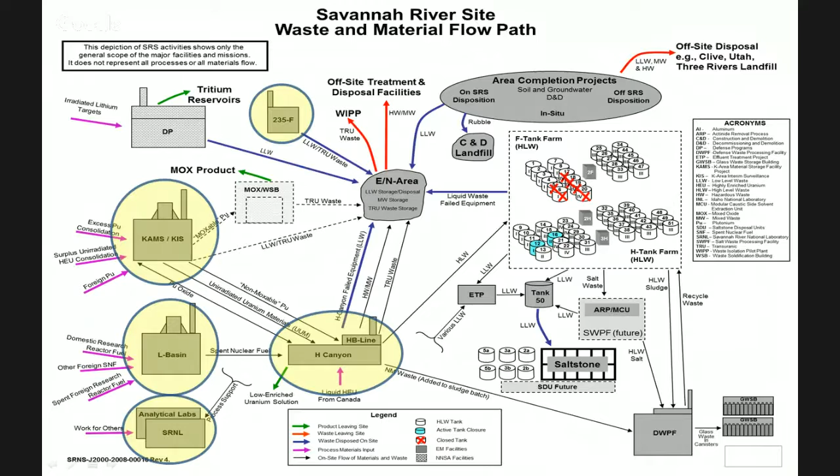Acronyms - most of you are probably familiar with those. Nothing new has been added to the list. In this presentation, I believe I've cut out most of the acronyms and spelled most things out to save space.

And if there's something you see that you don't understand, I think we might have a few minutes so we can take time for interruptions if you want to ask right now.

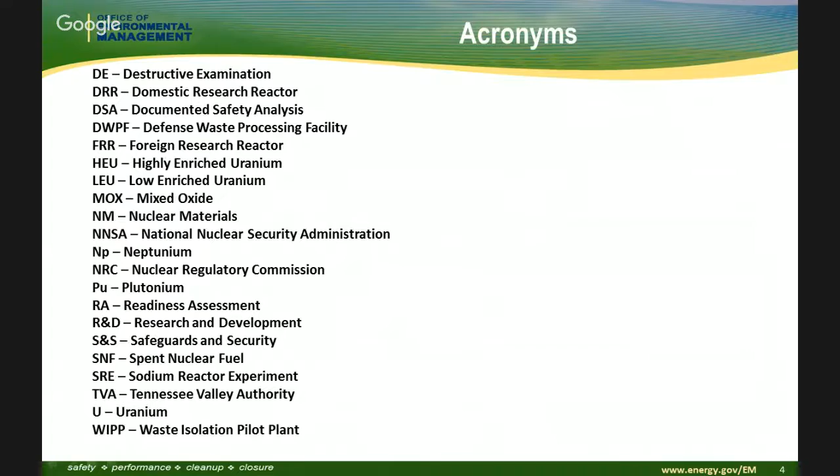All right, so what we're going to go through today for the system plan or management program is talk about the assumptions and approved missions we have in facilities that are operating now in nuclear materials. A couple of pictures here.

This is actually a sampler that was installed as part of a test project for one of the labs on the West Coast - I think it might have been Pacific Northwest Lab. We offered the Canyon as a test bed for some technologies that people wanted to test. This is a version of a sampler that's actually installed and operating in the Canyon right now.

The one that's installed is called Short Path Ultraviolet Visible Light. This is looking at plutonium solutions in the ultraviolet or visible light spectrum. This is a long path, which would allow us to look at more dilute samples.

The short path was actually quite useful when we were starting up HB line and processing material up there. Do you recall there was a robot inspection done in the ventilation, the main ventilation tunnel, back a few years ago? This is actually a 3-foot section of concrete, 1 foot thick, that we core drilled out.

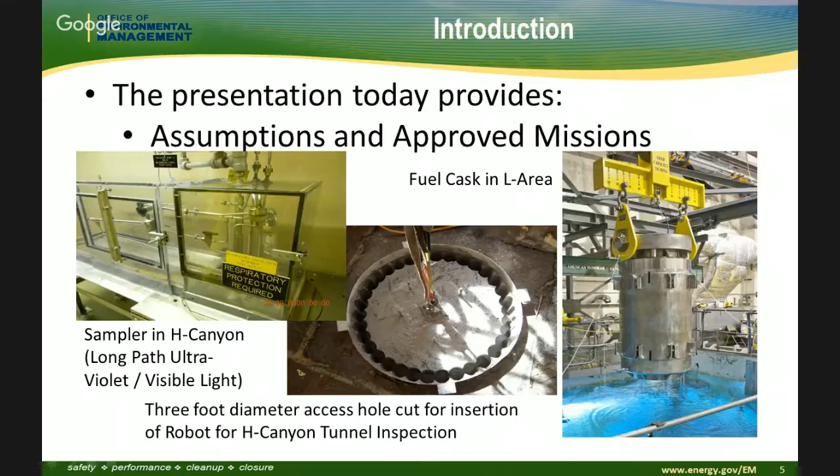Whatever that thing is, all right. That was supposed to prompt Maxine to say what it was, Triga fuels. Go ahead if you want to. No, I'll get it wrong. We don't have a trigger here. Yeah, we don't have triggers.

So this first group of facilities, H Canyon, HB Line, K area, L area, are all under nuclear materials purview. Those facilities belong to Pat McGuire, and I work for Pat. Tony Folger also works for Pat, and Maxine does too. The F area and H area analytical labs are an important part, as well as SRNL. Of course, liquid waste, we couldn't do anything without our liquid waste facilities and our solid waste facilities in E area.

We also have some deactivated or inactive facilities, like 235F. I think you've had presentations on what we're doing there, and I'll talk about that a bit later. F Canyon, FB Line has been deactivated too, but that's a sister facility to H Canyon. The receiving basin for off-site fuels is basically what it says, where we used to receive fuels from off-site, now all consolidated in L area. And C area, a former reactor, along with K area and L area, has heavy water stored there.

We'll talk mainly about these first facilities and what we're doing there, along with a timeline, a bit about the middle section, and less about the bottom section except for 235F. I added a picture from 235F after last year. That's the former 235F facility, which included several facilities, including PUF, that you may recognize.

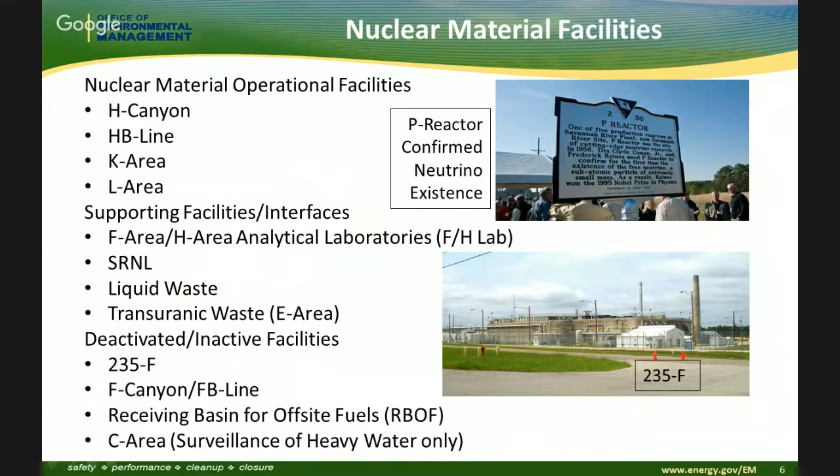So here are the main facilities still in operation, some repurposed but still under Pat's purview. We've got K-Area, which was a reactor facility and is now used primarily for storage of plutonium, and also some uranium. L-Area safely receives and stores spent nuclear fuel awaiting disposition, and H-Area is the disposition facility for spent fuel and also for plutonium and/or uranium stored in K.

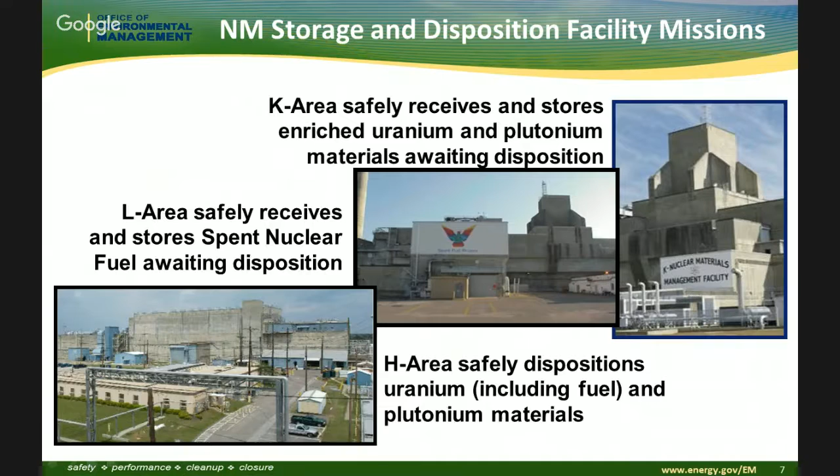General assumptions for our operations: we're always going to support the safe and secure operation of our facilities to disposition uranium and plutonium, and store those materials awaiting disposition. We're also going to meet any DOE, environmental management, and NNSA non-proliferation missions, which we do support. And we support efficient operations, which includes minimizing waste generation.

The picture I added here is spent fuel being charged to the dissolver, dated August 13th, 2012. If you remember discussions about the sodium reactor experiment fuel we processed, which was potentially vulnerable to long-term storage, we began planning for that when Don was there and actually processed it in about a year and a half. That was the first batch of fuel inserted into the dissolver.

This is a shot inside of K-Area. These are what we call 9975 drums, model 9975. Every type of storage container gets a number, and these just happen to get 9975. They can be used for storage and/or transportation across the U.S., and have been used for transportation.

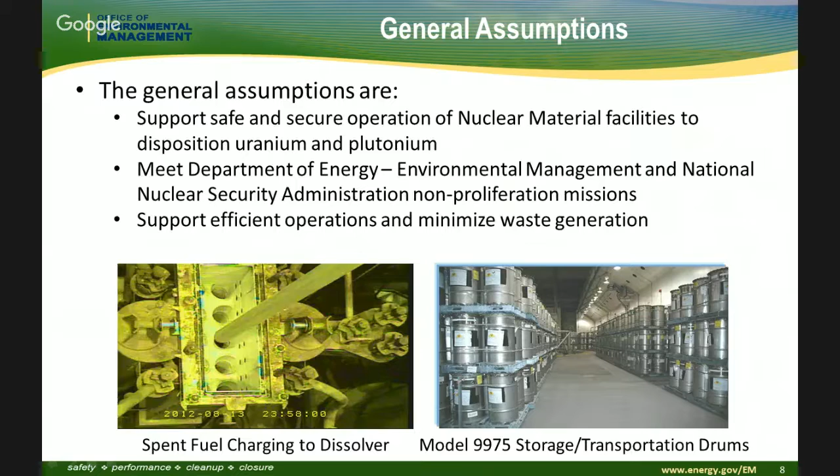So getting into the meat of it, H-Canyon. I mentioned that we had dissolved sodium reactor experiment fuel. We started that in 2013, finished up in 2014. At least a third of those solutions have been sent to the DWPF facility for vitrification, and that is ongoing and will be ongoing for several years. The DWPF process can only take so much at a time, so we'll be doing that for the next 5 or 6 years. But the fuel has been dissolved.

The amount of uranium in there was very low, so we did not recover that and process it for sending to TVA. We are in the process of starting up the parts of the canyon that have been idle since about 2011.

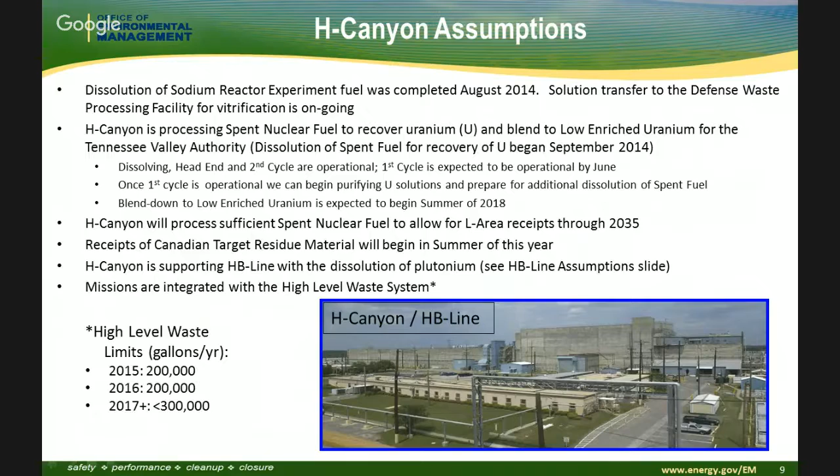HB Line, H Canyon is - I'm waiting for the slide to go back - pretty much a crane-operated facility. There are 2 cranes that travel the entire length of the canyon. Pretty much everything in there is remotely handled. There are some limited areas where people can go inside the canyon, but for the most part it's remotely operated. It's a smaller facility, and it's hands-on operation.

And that's one set of the glove boxes that are in HB Line. And that is an operator right there. He is dressed out in PCs and has his gloved hands through more gloves that actually extend into the glove box.

This is just an end view of the canyon, looking north. And again, there's HB Line. Those are administrative offices, a support facility, which is the top 2 floors.

So the mission right now that the canyon is supporting with HB Line is the production of plutonium oxide that will either meet the MOX spec or would be suitable for blend down in K area. We'll talk about that in a minute. But there is some material that is non-moxable, which we are planning to blend down in K area.

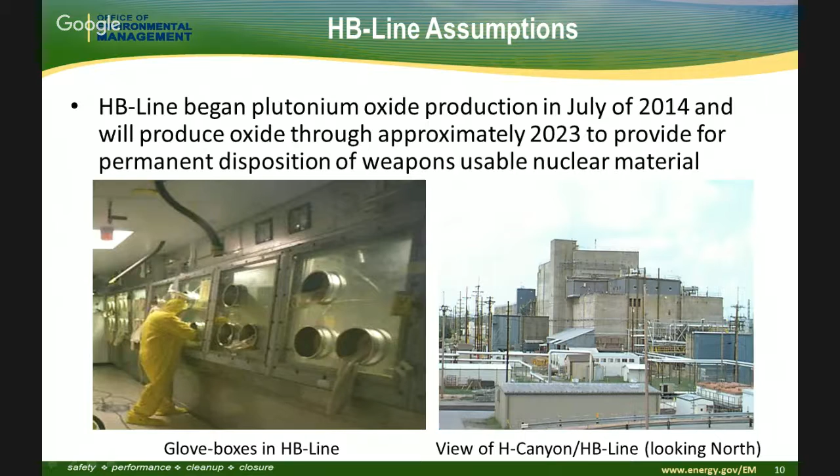So we talked about K area storing plutonium, primarily plutonium, and also some uranium. The plutonium that the Canyon is dissolving and sending up the HB line to make the suitable product for MOX, once it's processed, is sent back to K area for storage until needed by the MOX facility, or if we decide to blend that down for disposition to WIPP. So the second bullet talks about that disposition line.

If we had just one line in K area, we're modifying what we call the K area interim surveillance line, which is where we do destructive examinations, talked about in the third bullet. We're modifying that line to be able to blend down plutonium. Currently, we would take about 150 grams of plutonium, mix it with an inert material, and send that to WIPP. We proved that process up on HB line. When we put the process in K area, we're going to be able to do about 300 to 350 grams of plutonium in a different container that's called a criticality control container.

But anyway, that is going to be the disposition for the non-moxable plutonium, and possibly the plutonium that would be moxable. We've probably done about 80 of these destructive examinations. We actually take cans of plutonium oxide, cut them open, and examine the containers.

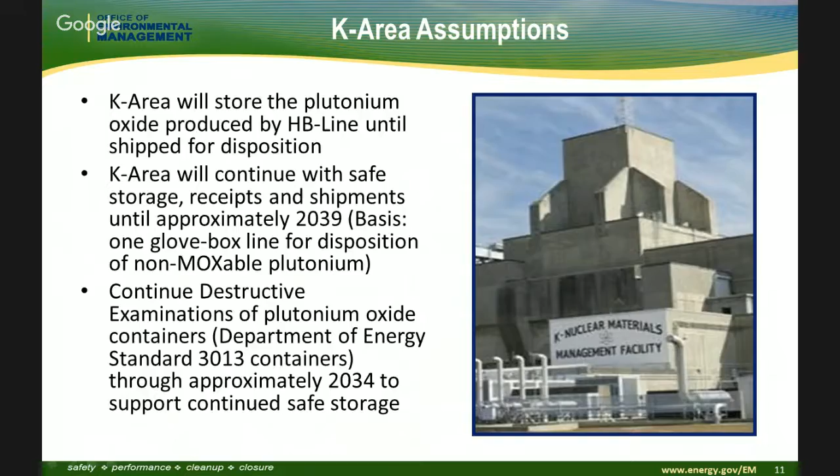All right, so now the L area - I mentioned that the spent fuel has been consolidated across the site. We still do receive foreign research reactor fuels. We receive domestic research reactor fuels. The domestic research reactor fuels come from universities or from a reactor such as the high flux reactor up at Oak Ridge - it's a research reactor. And then the spent fuel, the foreign fuel, of course, from various foreign countries, and I think we talked for some length of time, sheet number 2, on that.

Right now, we have a record of decision that we are not going to receive any more foreign research reactor fuel past May 2019, and we expect to receive domestic research reactor fuel through 2035. That date could be changed, but there is no movement right now to change that, and that is an NNSA program.

And as I mentioned, the processing of the Canyon will eliminate the need for installation of new storage capacity racks and others. We also have a good bit of heavy water. I mentioned that we had some. We also have some stored in L and K, and at some point we will also have a disposition path for that material.

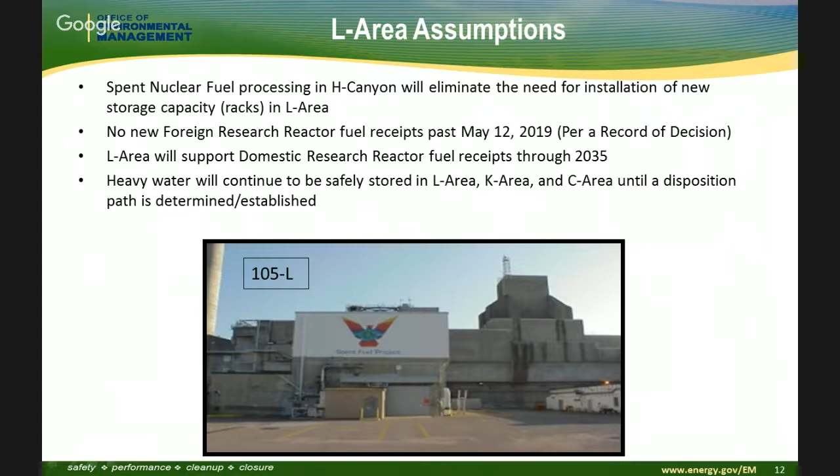So I mentioned we have the four facilities: H Canyon, HB Line, L area, and other facilities we rely on. A couple of those are the Savannah River National Lab, which for every material introduced into the canyon, there's flow sheet development—they specify concentration of nitric acid, temperature, and other processing parameters. We have an analytical lab in F area and H area that looks at samples to make sure we're meeting the purity spec for plutonium coming out of HB line, or for the HEU coming out of the canyon that eventually gets blended down and goes to TVA. So those are two very important facilities.

And of course we also rely on the infrastructure of the site—waste management, medical facilities, roads, things like that. There is a bit more attention now being paid to the infrastructure used at the site. I think we've finally talked about it enough that people will take notice of that.

A couple more pictures here. This is a vacuum salt distillation piece of equipment installed in HB line about 4 years ago. You can take oxide, say plutonium oxide with high chlorides—which can damage equipment in the canyon—place the material under a vacuum, heat one end, cool the other end, and vaporize the salts, consolidating them on one end to clean the material up. This was demonstrated quite effectively to remove a high percentage, I think 99%, of chlorides in different products.

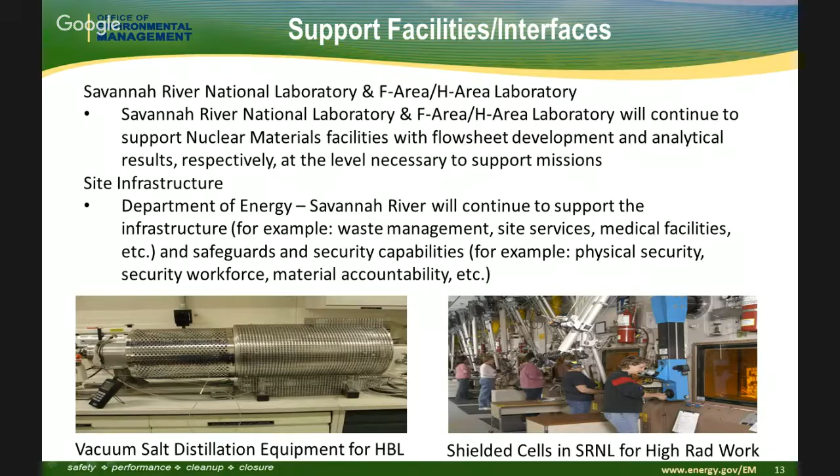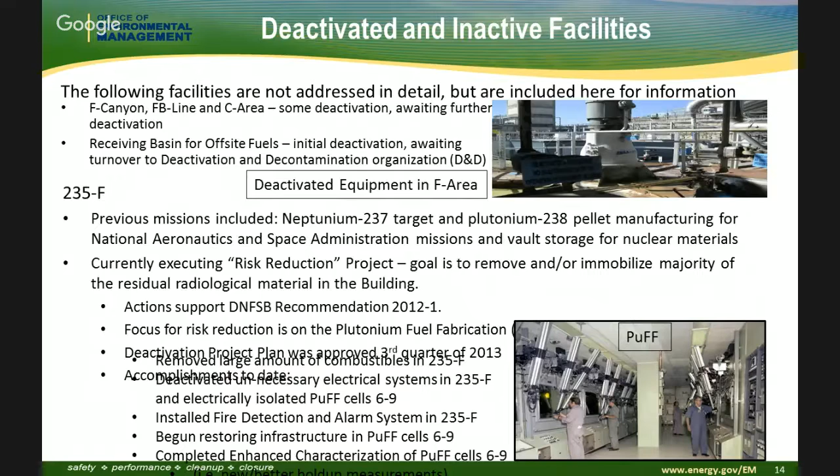So we talked about the facilities still in operation. I didn't mention waste on that last slide, but solid waste capability is very important—the canyon could not operate without that.

Now we're going to talk about some of the deactivated facilities. At the end there's a diagram laying out the dates, but I'll talk to it anyway. We've deactivated several: F Canyon, FB line, C area, P area, R area, which were reactors. F Canyon and FB line were sister facilities to H Canyon and HB line. In F Canyon, FB line, and C area, we've had some deactivation, and we're awaiting further deactivation before those are transferred over to the D&D group. Same thing for the receiving basin for off-site fuels—that's awaiting transfer to the D&D group.

Now, 235F—when I talked about plutonium-238, there was a facility in the canyon called HB line, which we now call old HB line because there's a new HB line on top. The old HB line was actually on the 3rd and 4th levels of the canyon. That's where we produced Pu-238 from products irradiated in the reactors. Those were brought over to HB line, plutonium-238 was purified, and sent over to 235F. 235F took that oxide, pressed it into pellets, clad it, and sent it up to the Mound facility, where it eventually was made into radioisotope thermoelectric generators put on spacecraft. The last big one was Cassini, which used lots of plutonium-238, and smaller ones, the Mars rovers, had half-size RTGs. That facility has been deactivated since the late 80s, early 90s.

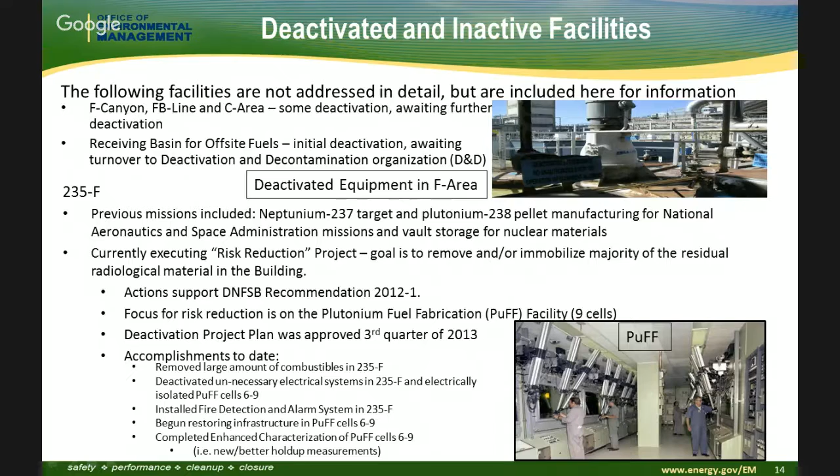So the next step - well, we've actually done some better measurements over the years. We've done about 3 measurements that I'm aware of since 1990, and every time we do that, we have better equipment and better means of assaying the material in there. But the next step is going into those cells that have the highest loading and actually removing that material, either stabilizing it or putting it in a safe configuration, and getting it out of this very, very old part that I talked about.

Everybody has copies, probably you can see. So if you were looking at our system plan, this chart would extend out for decades. I'll just run down some of the dates - if I had a full chart here, it'd be very small, nice type, but these are the main missions ongoing in those 4 major facilities.

In H Canyon, which is where the spent fuel dissolver and PU dissolver are, we've completed the sodium reactor experiment fuel. We've now moved on to doing set fuel for uranium recovery and then blend down like we've done before, sending that off to TVA. We'll also begin dissolving the high flux reactor fuel from Oak Ridge. That mission right now, this arrow would extend out until about FY 23 or 24.

Same thing for the PU dissolving that is currently ongoing in support of a future feed for MOX, if that decision remains - again, about 23 or 24. Those are kind of joined at the hip because economically, if you're doing one, it makes sense to do the other. The H Canyon truck well is where we are getting ready to receive the Canadian liquid. Like I said, we'll be starting up this summer, and right now, schedule-wise, we're looking at about July for receipt and processing of that material.

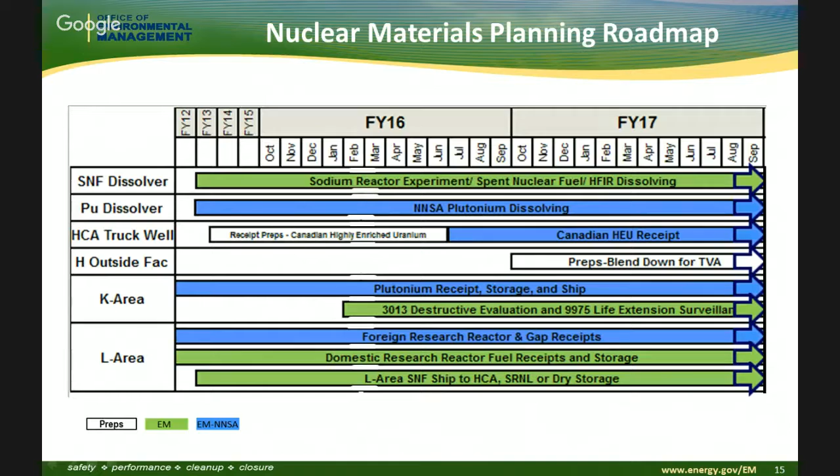And that depends on what your assumptions are and so forth for when that is constructed. So, just a wrap-up slide, and I threw in some extras here.

Starting with the Canadian liquid. This is a target residue material pig, that's what we call the Canadian liquid. Target residue is what's left over after they extract the Moly 99. In a pig, this is actually shielded.

The containers, I didn't go into a whole lot, but we're actually going to ship those containers in an LWT cask, which is used as kind of a workhorse for L area, for NRU, NRX fuels, and a few other things across the complex. But we're going to use that to put the liquid containers in. Those get put into the shielded pig, which has lead on the outside to knock down the rad from that.

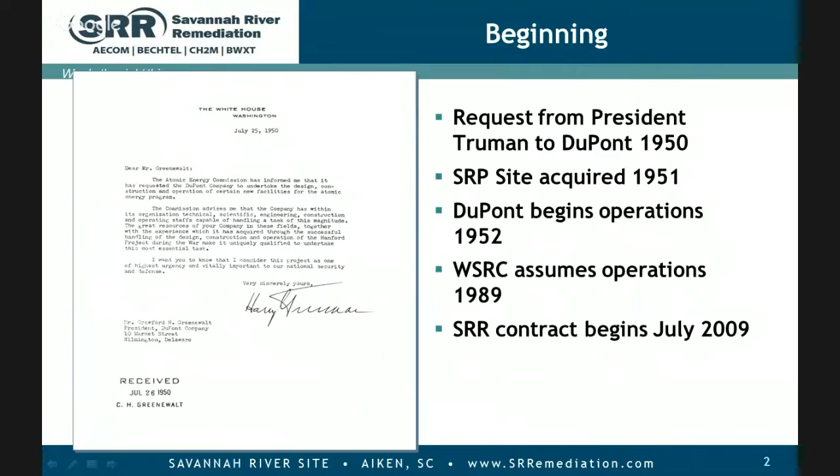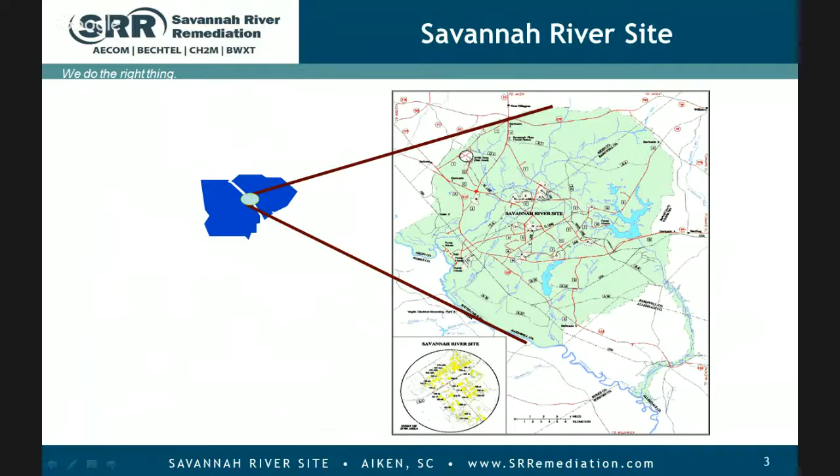It all started in the 1950s with President Truman asking DuPont to build the Savannah River plant as a redundant facility to the Hanford site, to produce special nuclear materials for the weapons programs. The Savannah River site is 310 square miles, 5 reactors, 2 separation facilities. Construction started in 1951. The first reactor began operation Christmas 1953. The two separation facilities, F Canyon and H Canyon - F Canyon began November 1954, that's when they generated the first waste, put into tanks 1 through 8. H Canyon began July 1955, and likewise the first tanks there were 9, 10, 11, 12, receiving first waste also in 1955.

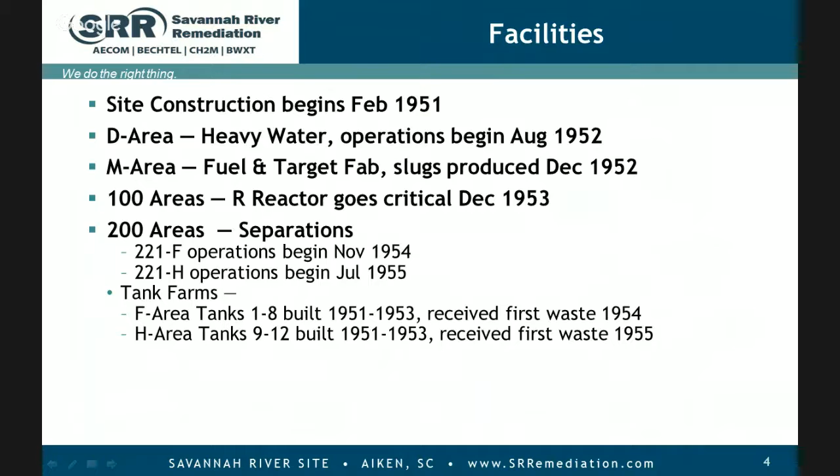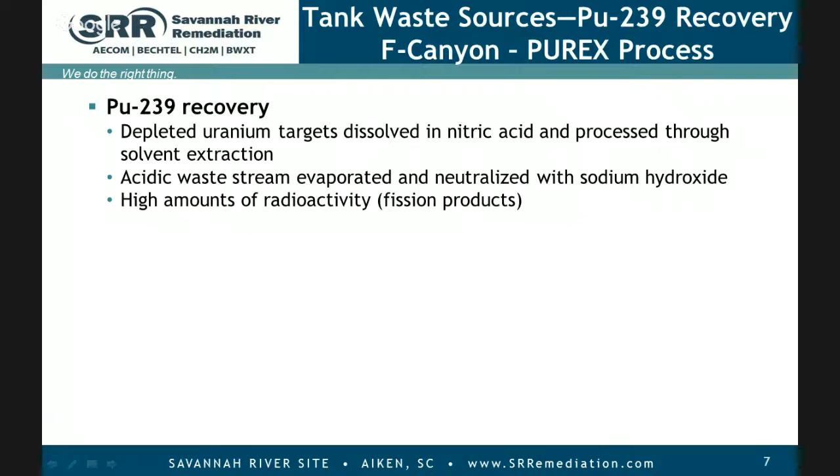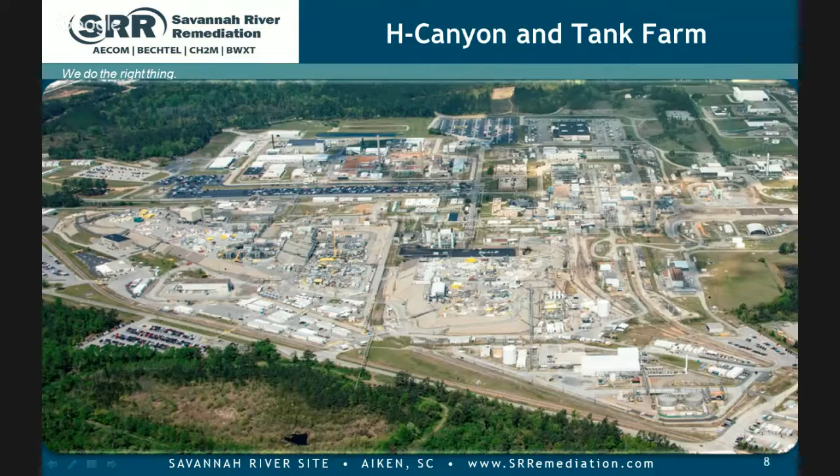Here is H Canyon, kind of sitting on end right there. Here is H Tank Farm - you can hear about ARP/MCU right in there, the 3H evaporator we're talking about is right there, this is all H Tank Farm as well. As I mentioned, H area was initially designed to extract and collect the PU-239, but later in the 50 years of operation, F Canyon had sufficient capacity, so H Canyon was repurposed to recover U-235 from the reactor fuel that was not spent during the process of the reactor. Just like the plutonium, the fuel rods were dissolved, uranium is extracted along with the neptunium, and all the fission products are dumped to the waste tanks.

I heard it mentioned in the nuclear materials subcommittee, but H Canyon also did some PU-238 recovery for the space program. But again, if it wasn't the desired product, everything else was dumped to the waste tanks.

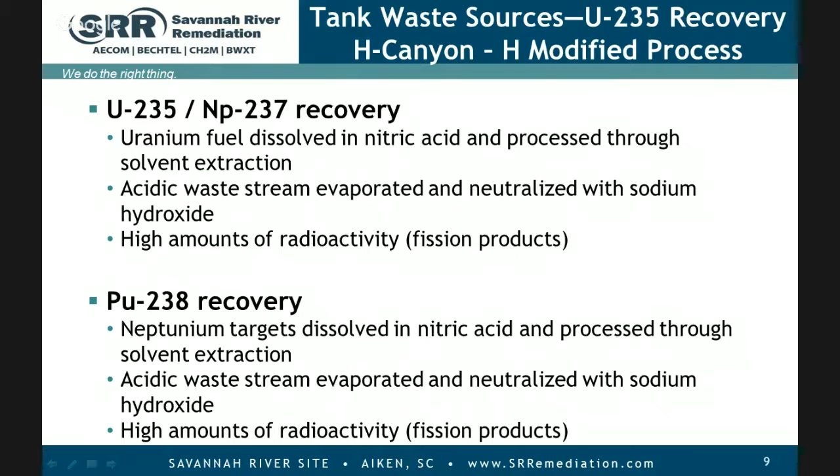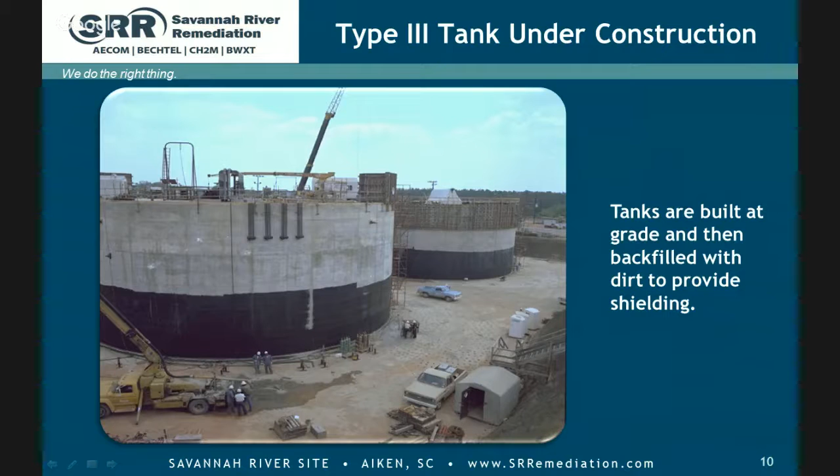I'll describe those. So that brings us to the liquid waste mission. Our job is to safely receive and store liquid radioactive waste, convert it into stable, inert solids, and then close the tanks when they're empty.

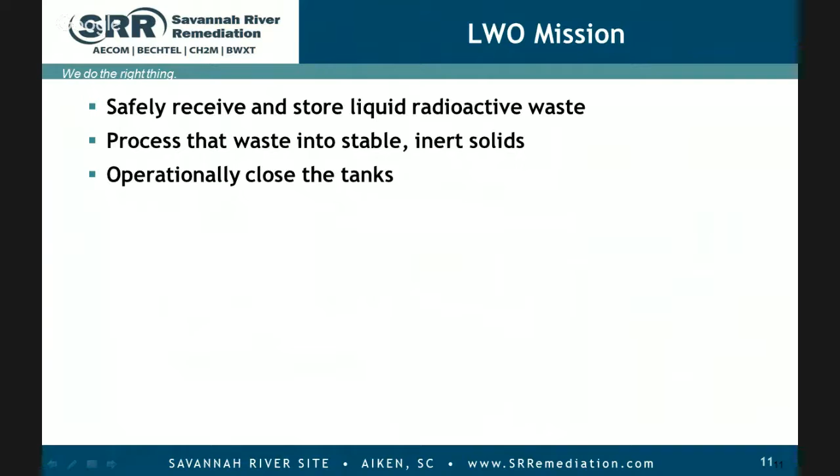Talked about the different lines. There are 4 types. Type 1 tanks were the first constructed - that's 1 through 8 in F area and 9 through 12 in H area. They're 750,000 gallons. These tanks have a secondary pan, kind of like a teacup on a saucer. So it's not full secondary containment, but the pan is 5 feet high on the side.

Tanks 5 and 6, which have been closed, and tank 12, as Jeff mentioned, that we're closing, are the type 1 tanks. The next tanks constructed are type 2 tanks - that would be 13, 14, 15, and 16 in H area. Essentially the same design, just a little larger. They also have the 5-foot pan. Tank 16, which was closed recently, is a type 2 tank.

I'll skip to the type 4 tanks. I can't explain why the type 4 tanks were built before the type 3. Tanks 17 through 20 and 21 through 24 - 17 through 20 are in F area. All 4 of those have been grouted. 21 through 24 are in H area. Those will be some of the last tanks of the older style tanks to be grouted.

These tanks were initially designed for lower heat waste from the canyons, so they do not have cooling coils in them, and they do not have secondary containment. They do have an underliner sump for any kind of leak detection. As I mentioned, they don't have cooling coils. The type 1, 2, and 3 tanks do have cooling coils.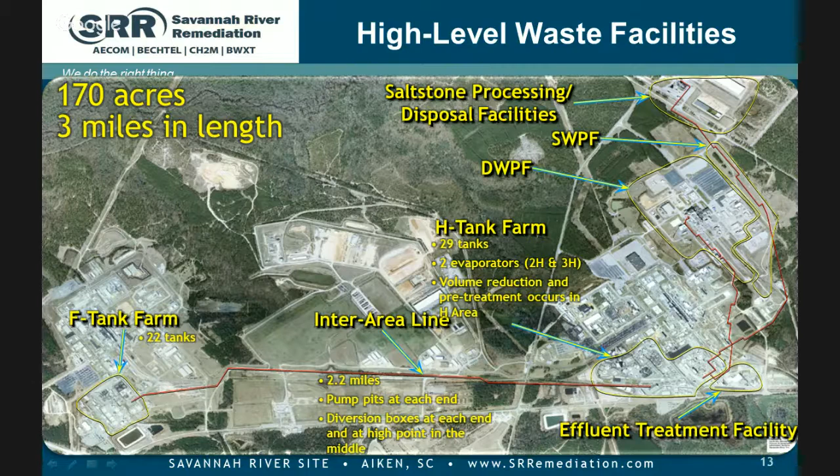Can I ask, on the waste tanks, can you give us roughly an idea of what year each one of these iterations were? Well, yeah, I'll give you some rough ideas to interpolate from. So these tanks, the type 1 tanks, were built '51 through '53. These tanks were built in the late 50s. The type 4 tanks were a little after that, but nominally the same time. The type 3 tanks, the last ones we put in service, were constructed in the late 80s. So that's a general timeline there.

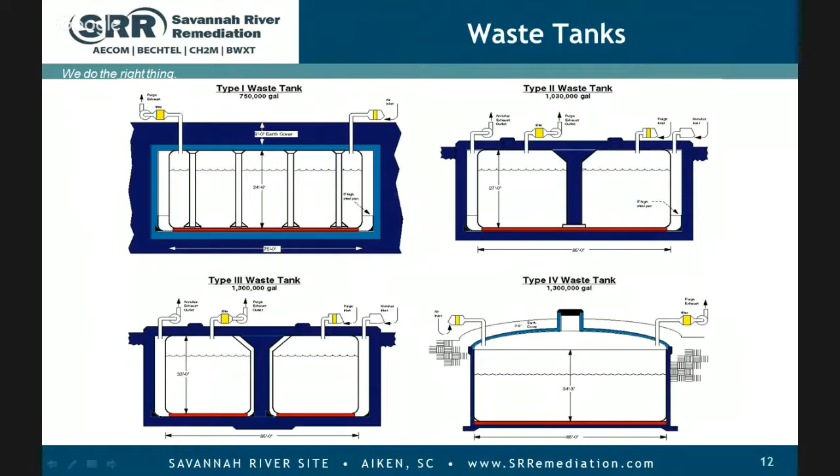So, I also heard this discussed a little bit when I walked in to the previous committee meeting. But H Canyon, and previously F Canyon, dissolved spent reactor fuel or target assemblies. They do that with nitric acid. At the time SRS was being constructed, all of the stainless steel that was available in the free world was needed for the canyons and the reactors. So the tanks themselves are constructed from carbon steel. So in order for the waste to be compatible with the carbon steel, it is neutralized by the canyon with sodium hydroxide, a caustic solution.

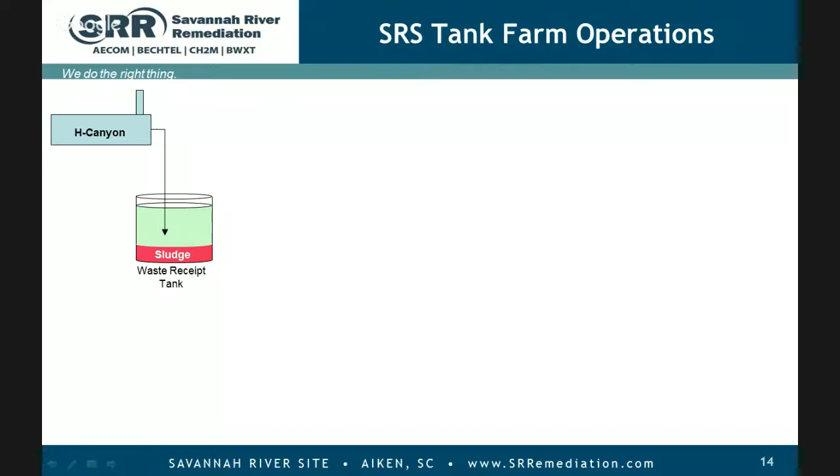And what that does is it causes metal hydroxides and metal oxides in the nitric acid solution to precipitate out, so that when the tank farm receives the waste, you end up with precipitated metals we call sludge in the bottom of the tank, and a caustic salty solution called supernate above the sludge. In order to conserve tank space, that supernate is decanted. We had 5 total in the tank farms.

Two are operating, one being the 3H discussed earlier. The supernate is sent to one of the evaporators, where excess water is boiled off and sent to the effluent treatment facility for treatment prior to release. The concentrate from the evaporator is sent to a concentrate receipt tank where it is cooled. These are all tanks that have cooling coils in them.

As that concentrated solution cools, salt crystals form and fall to the bottom of the tank as a salt cake. Some of the concentrated supernate won't crystallize, and it can be sent back to the feed tank and passed through the evaporator a couple times. But after nominally 3 passes through the evaporator, it's not practical to evaporate any more water out of it, so it's parked to the side in another tank and sits there as concentrated supernate.

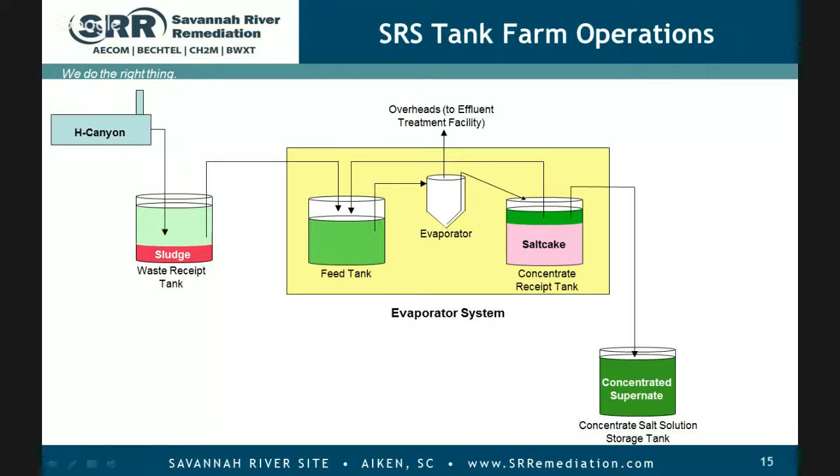Our inventory as of the end of December 2015 was 36 million gallons, less than 10% of that, 2.6 million gallons, is the sludge at the bottom of the tank. The other 93% is salt waste, a generic term for both the supernatant and the salt cake, and those are about equal portions out of the 33 million.

Interestingly, if you look at the other side, it shows where the 250 million curies reside. You'll see that the sludge, while less than 10% of the volume, contains over 50% of the radioactivity. When we talk about long-lived radionuclides, actinides, plutonium, uranium, those kinds of things, they're almost exclusively within the sludge. Out of the remaining 50% of the curies, it's obviously in the salt waste, but only a small portion, 5%, is in the salt cake itself. So salt cake is primarily inert salt crystals.

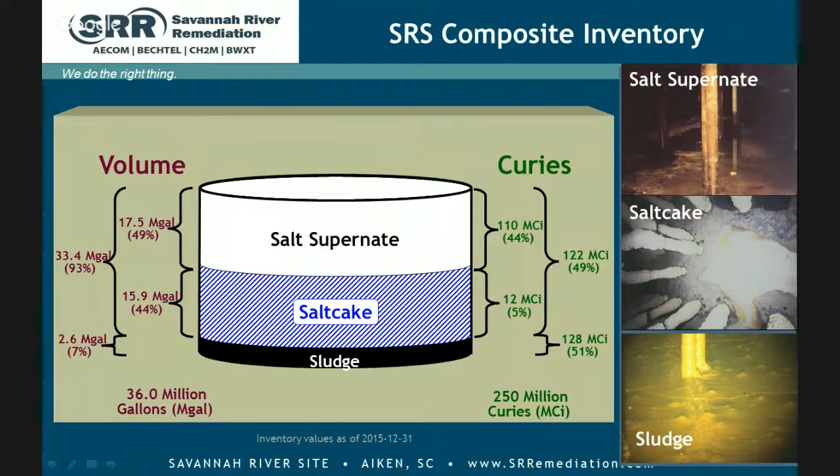Here's a picture of Tank 11 taken at the Savannah River Site. This is from the late 70s. You can see it's a very thick, gelatinous kind of material.

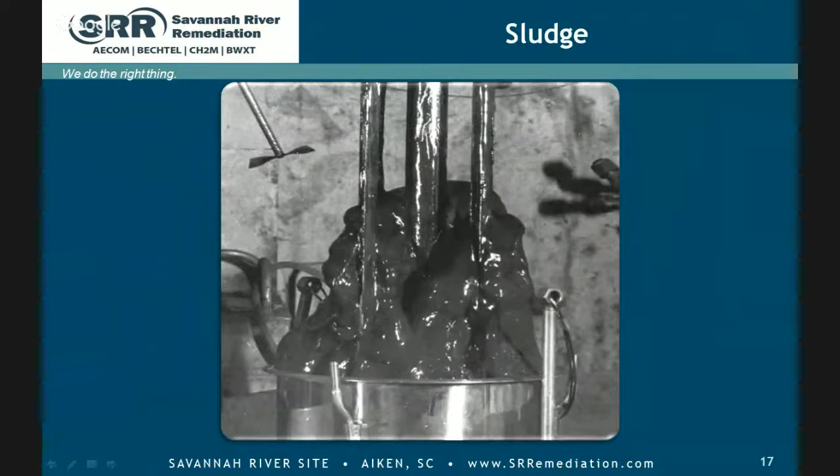Here's a picture from inside a tank with sludge. One of the aspects for safely storing the waste is to make sure we keep the tank head space ventilated at all times. You get radiolytic decomposition of water in the sludge that generates hydrogen. So when I talked on that earlier slide about our job of safely storing the waste, two of the key attributes are making sure we ventilate the head space and keep a non-corrosive environment inside the waste tank.

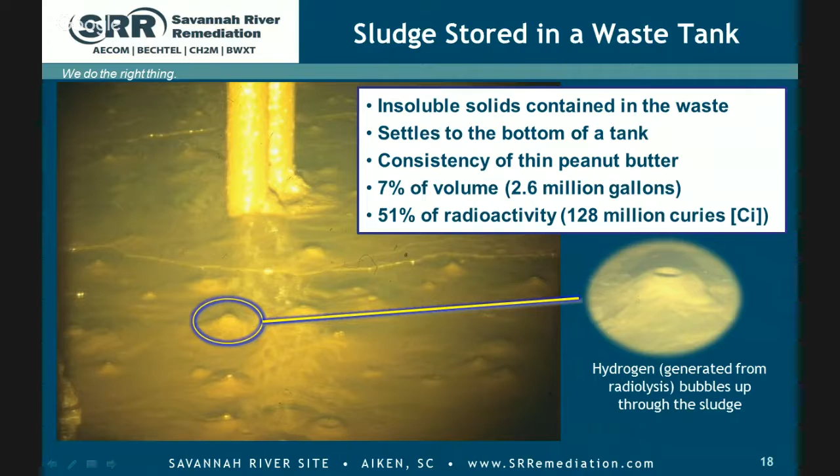The salt waste—the concentrated supernate—is a thick liquid, kind of like a varnish. The precipitated salt, like the salt blocks or stock put out for deer, is very hard. All radioactivity in the salt waste is within the concentrated supernate, and it's primarily cesium-137.

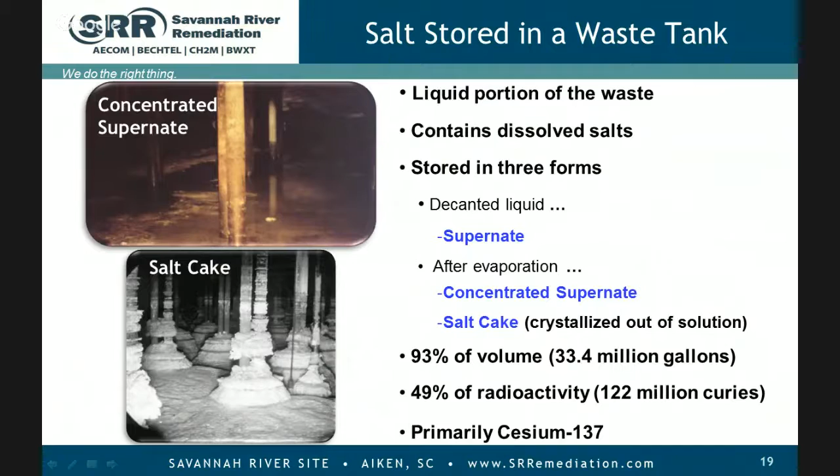So we talked about storing the waste. The first thing, in 1996, we started operating the Defense Waste Processing Facility, just over 20 years ago in March, its anniversary. It started initially processing sludge waste only, and we do that by putting large mixing devices in the tank, suspending the sludge, and transferring it out to a tank—this is the tank for the facility.

We've done that in a couple of ways. The current methodology is primarily mobile equipment, stands for waste on wheels, so this is a reusable tank. Here, several different kinds of mixing devices are used. The acronym SMP is a submersible mixing pump. CSMP is a commercially available mixing pump that's not rad hardened, but sufficient for use.

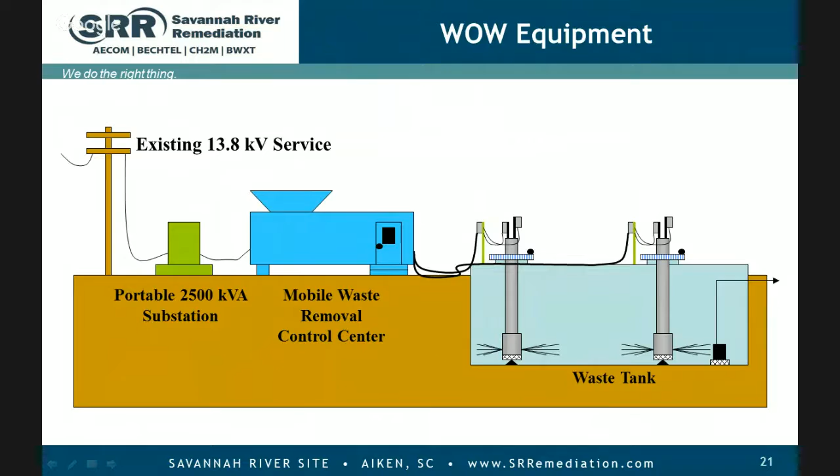And that kind of is the first step. Removing the solids out of the tank is the first step in getting into the closure process, and that's the bulk waste removal portion. We also then move into mechanical heel removal, which uses, for the most part, the same mixing devices. In the first 3 or 4 operations of the pump to suspend the solids and pump them out, the vast majority of the solids come out—like 90, 95%.

And then you're left with a heel at the bottom where you need to add more water. It's kind of like rinsing peanut butter out of a peanut butter jar—you can do it, you just need more water when you get to the end. Some of the tanks will deploy chemical cleaning, particularly the sludge tanks, to get the sludge immobilized, as I mentioned, the actinides within the sludge.

Getting most of the sludge out is important. We'll do that with oxalic acid, sometimes sodium hydroxide. A few of the original older style tanks had leaks into the annular space. If it had one of those leaks, we have to clean out the annulus, flush the cooling coils, drop it, sample it, demonstrate what's ready to be flushed, and go to the closure process.

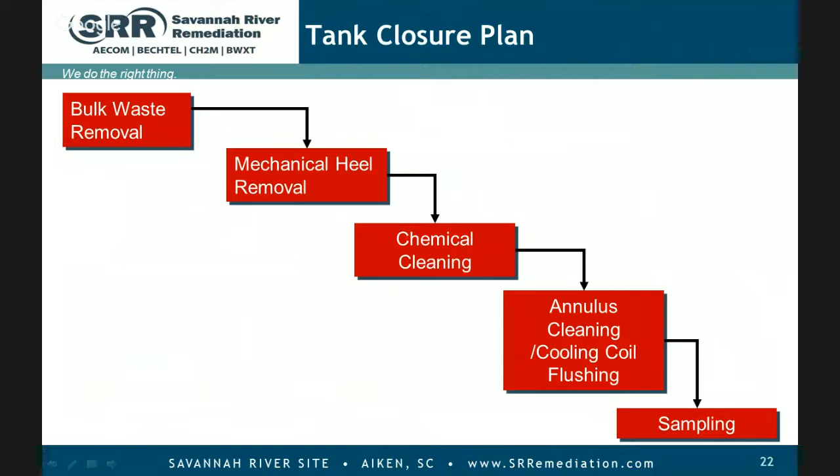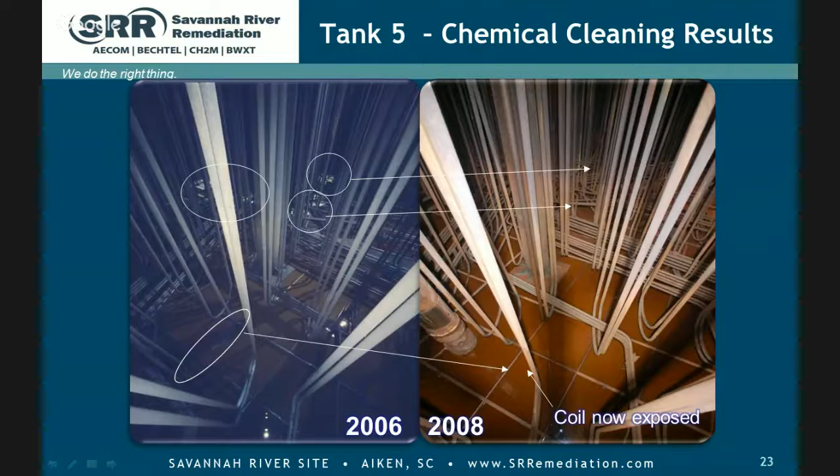Here's the effectiveness of chemical cleaning on the left. These are from tank 5. It's kind of hard to see on the screen here, but waste is obviously in the areas of the circles, and after chemical cleaning, the waste is no longer there.

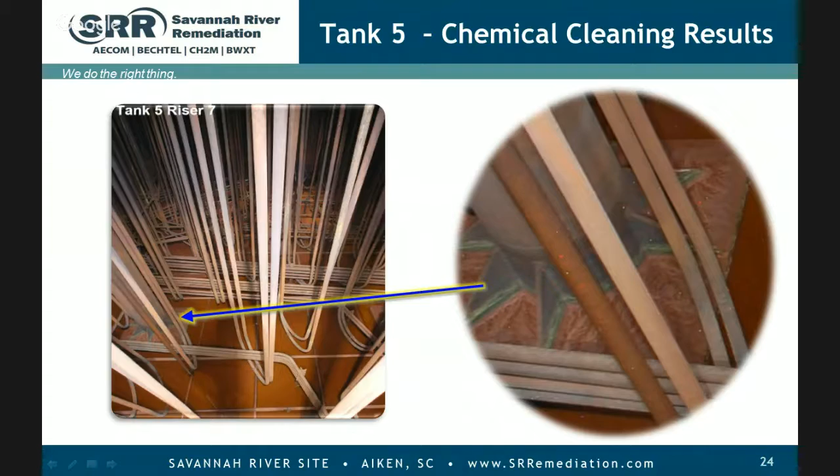Similarly, you can see this plate here for roof support. That's less than half an inch thick, and you can see most of that thickness. So chemical cleaning was very effective. The tank had leaks into the annular space.

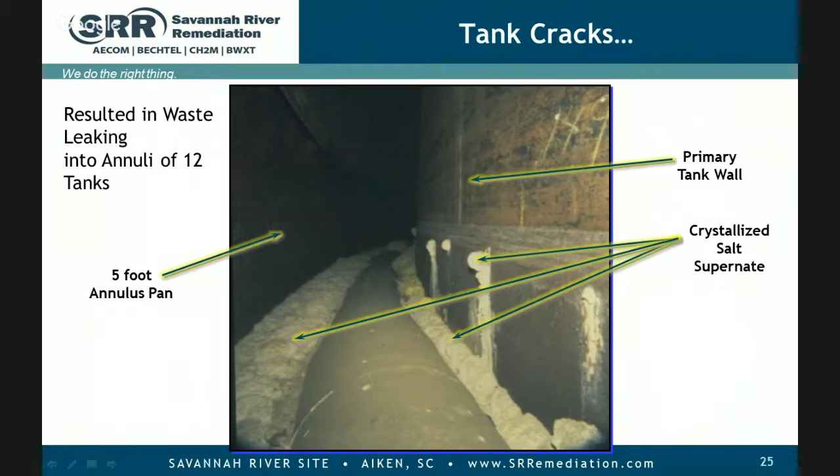This is from tank 14. You can see there was some stress cracks at weld sites, and when the salty supernatant reaches the dryer annular space, it forms something like a stalactite. In this case, water would be added to dissolve those solids. For the ones sticking to the side of the tank, we have a little magnetic roller that can go around the brush and remove it. You can see on tank 5 and 6, we removed 10 gallons to show this.

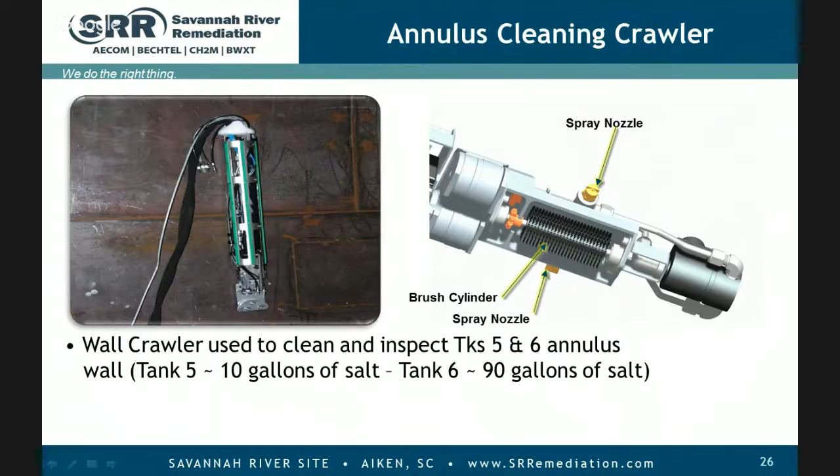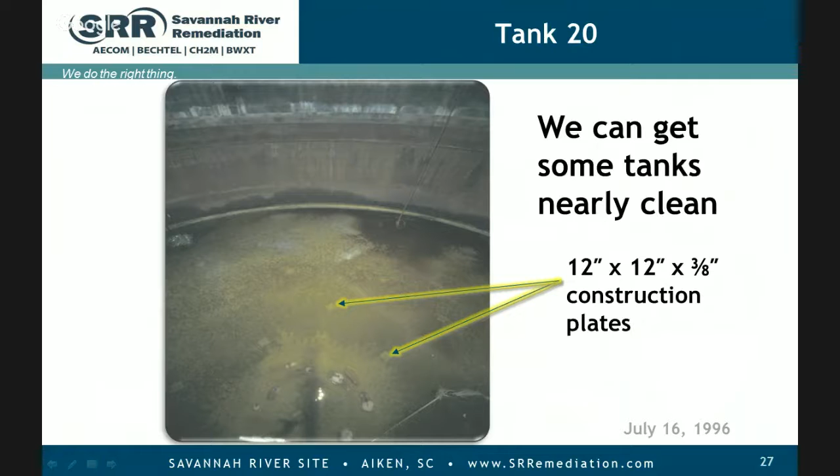So I have a little video here showing the grouting of tank 12.

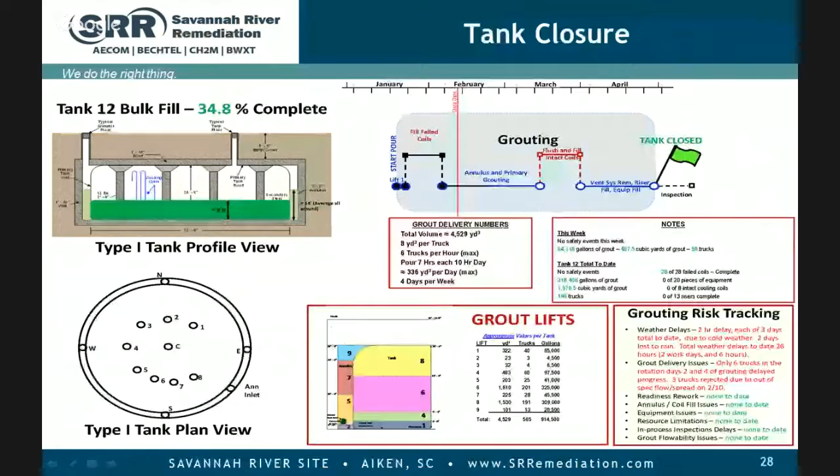Sorry, for some reason, I'm here. You're slow today, yeah, even from the sound. Yeah, so we can skip that.

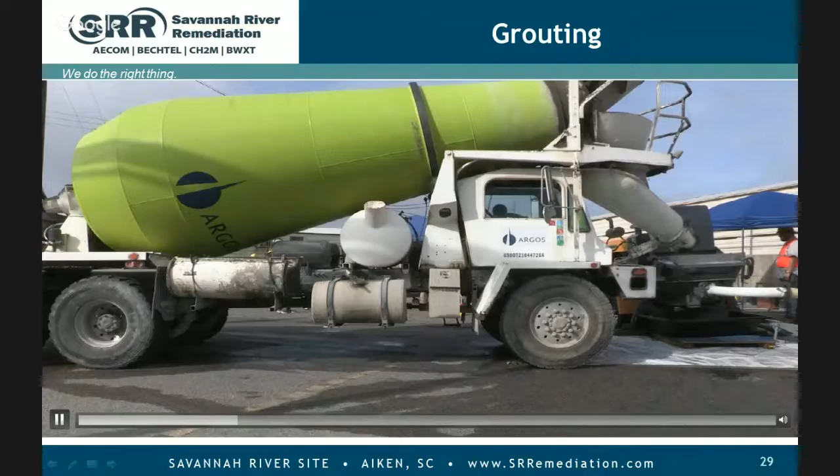So we've talked about what we do with the sludge. Now we'll focus on accommodating the salt part of the waste. A couple of years ago, in 2008, we employed a process called DDA, where we took the lowest purity salt solution. Remember that the salt cake itself has very few radionuclides in it. We decontaminated that further by draining any interstitial liquid out of it, dissolving some of that and processing it in Saltstone.

The next step, what we're currently doing, is operating ARP-MCU. ARP is actinide removal process; MCU is modular caustic side solvent extraction. It is a demonstration of the process that will be used at SWPF.

The process itself: we have a feed tank, tank 49. We transfer about 3,000 gallons at a time. That's into the strike tank, where monosodium titanate is added, and any actinides or strontium in the solution will adhere to the MST. That allows us then...

...to transfer that to another location, 512S, a facility. That material is passed through a filter, which then filters out the MST, which has strontium and actinides adhered to it, and any sludge fines that may have been suspended in the salt solution.

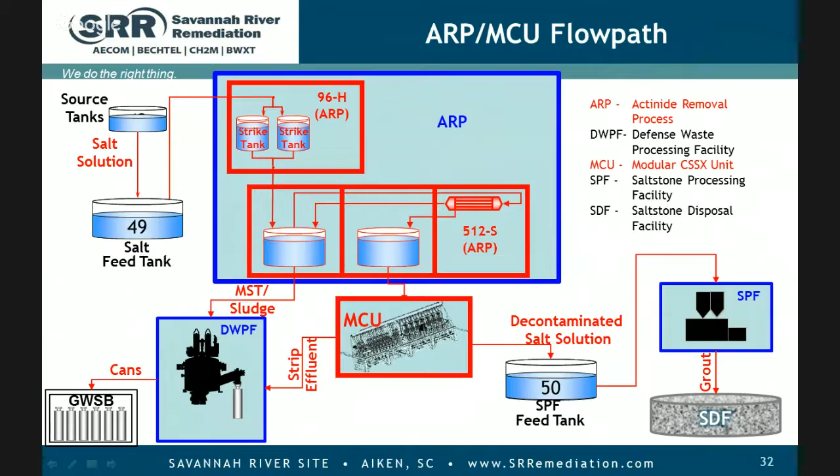Here's another one you'll have to click on. It comes up.

Change. Very good, give it just a second, it's got to finish opening. That's up to you, I mean it'll probably... Yeah, we can come back. Go ahead, we'll try to go ahead.

Essentially, the way the Turbo contactor works is we feed two streams: one is the solvent, the other is the salt solution, into the contactor, which is spinning very fast. Those two materials come in contact. The solvent contains an extractant, which likes the cesium in the salt solution and grabs onto the cesium molecule. The spinning contactor then separates the solvent and salt solution back out by centrifugal force, so the solvent contains the cesium and the salt solution has been decontaminated. You can then reverse that process by contacting the solvent with nitric and boric acid, in which case the acid ends up holding the cesium, and that's what we send to DWPF for processing.

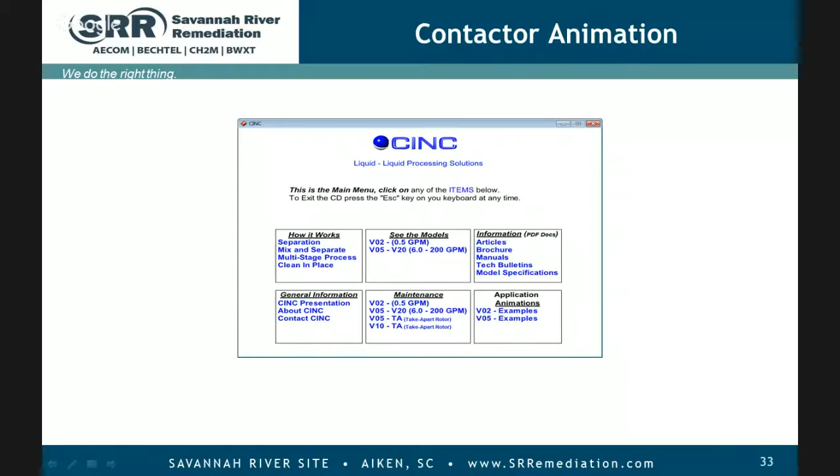The procurement spec for the unit, the TCCR unit, would be something that we'll procure from a subcontractor vendor. If you go to the next slide.

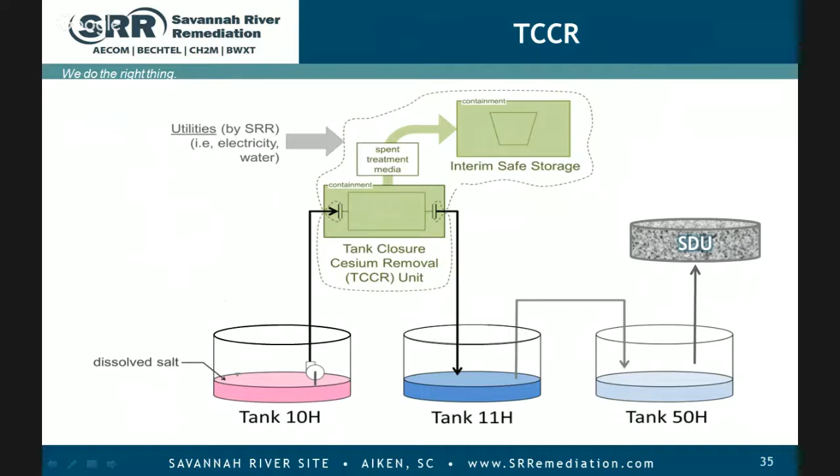If you noticed on the earlier diagrams, the TCCR and ARP/MCU are targeting dissolved salt cake because it's lower in cesium concentration. SWPF will be designed to process the concentrated supernatant, about 5 times the activity level that ARP/MCU can process, and also, depending on assumptions around ARP/MCU performance, 3 to 5 times faster. But the process SWPF will use is identical to ARP/MCU: we'll use MST for extracting strontium and actinides, and solvent extraction to extract the cesium.

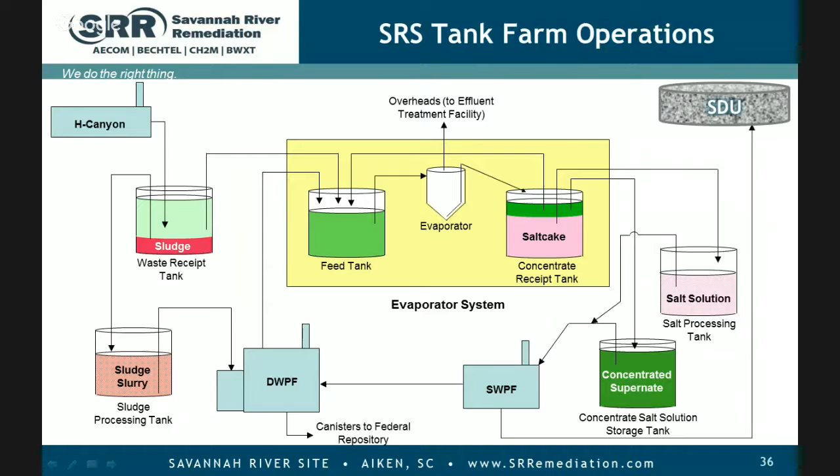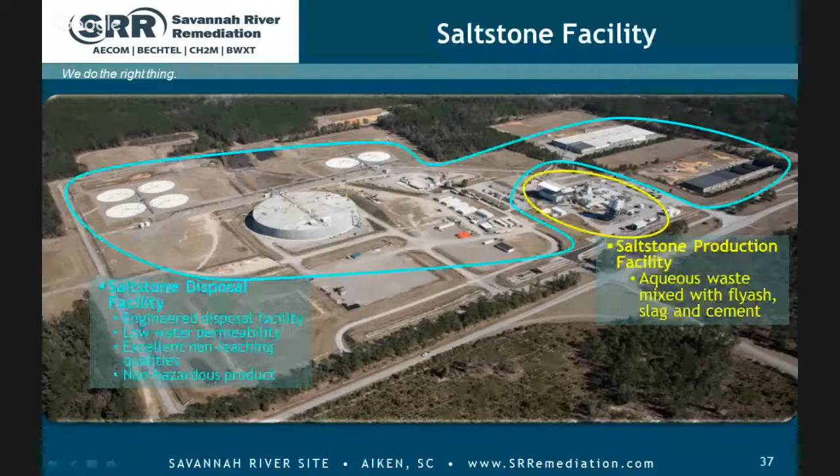What is fly ash? Sorry, just to jump in. So what fly ash is, is leftover, it's like ash - think of ash from the coal industry. I'm not sure exactly how it's manufactured, but it's a byproduct of an incineration process.

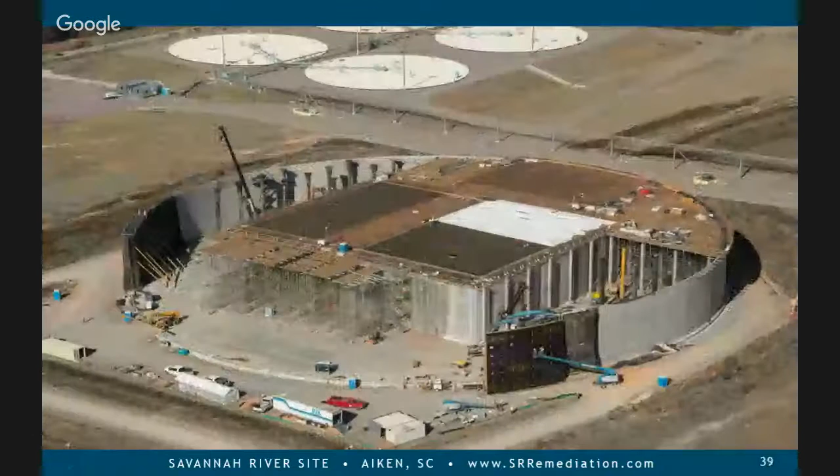And as we process, in the saltstone process we have 3 dry components: fly ash, slag, and cement, that are mixed together. That's sent to a mixer where salt solution from the tank farm, decontaminated salt solution, is added. The current flow path is through the salt feed tank into the mixer, mixed with the dry feed, into a hopper, and pumped out to SDUs 3 and 5 right now, and soon SDU 6. It's targeted to come online either late 2016 or 2017.

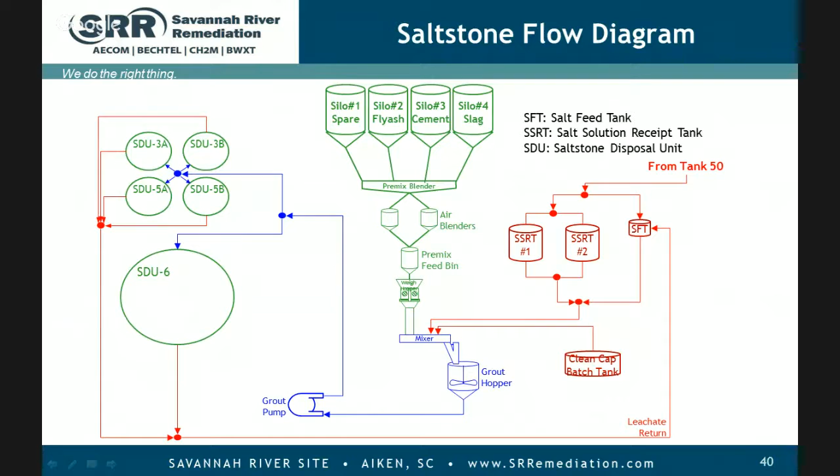Eventually, when SWPF comes online, since it'll have higher throughput, we'll need the benefit of some lag storage within the facility. The 2 salt solution receipt tanks will be in service then. We're in the process now of tying those in and testing them in the next month or so. That brings us to DWPF - as I mentioned, first operational in March 1996, the largest vitrification plant in the world.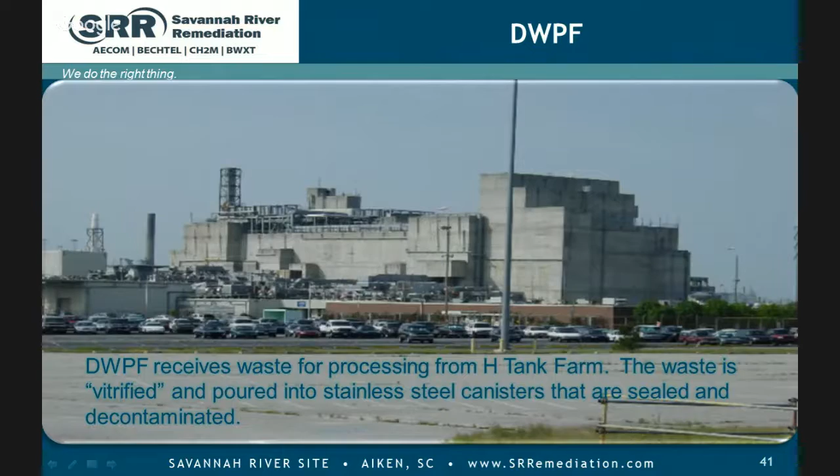DWPF receives sludge from H Tank, Tank 40 is the feed tank. It is received to the sludge receipt and adjustment tank within the SRAT, where we add the effluent streams coming from ARP, MCU, and eventually SWPF, so the MST sludge solids and the strip effluent are added into the SRAT. We also add formic and nitric acid to acidify the waste, and we boil the SRAT, which removes mercury from the process.

Once it's chemically adjusted, it's transferred forward to the slurry mix evaporator. This is where the glass forming chemicals are added in the form of a fine powder called frit. Once the batch is assembled, it's sampled and analyzed to confirm it meets product specifications, at the melter feed tank where it's fed to the melter. I'll describe how that works on the next slide.

Filled canisters are decontaminated, have a permanent plug welded, and are temporarily stored in one of the glass waste storage buildings.

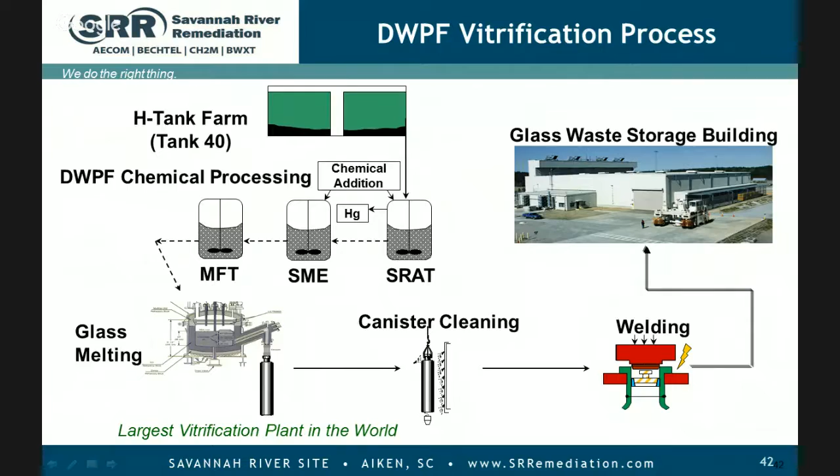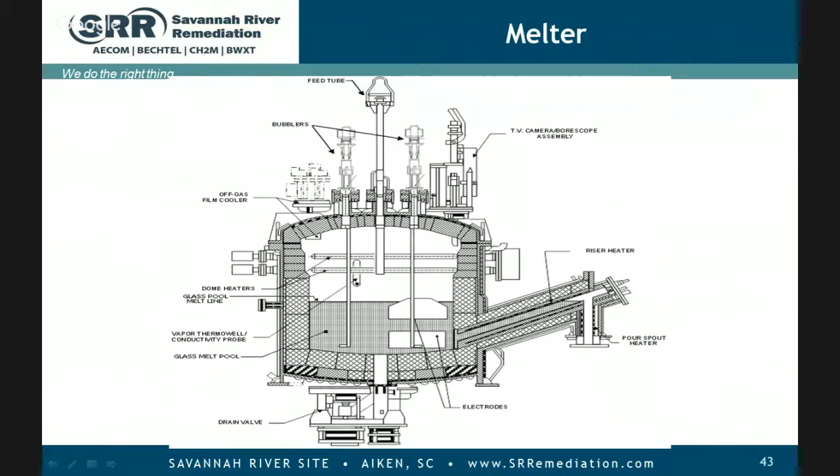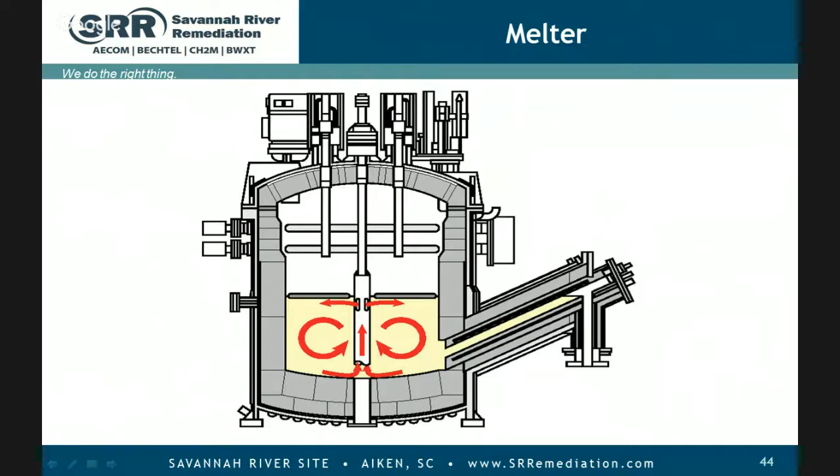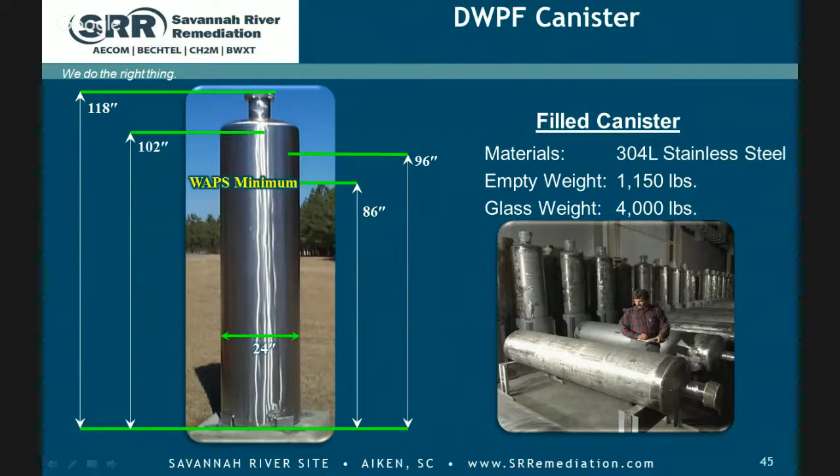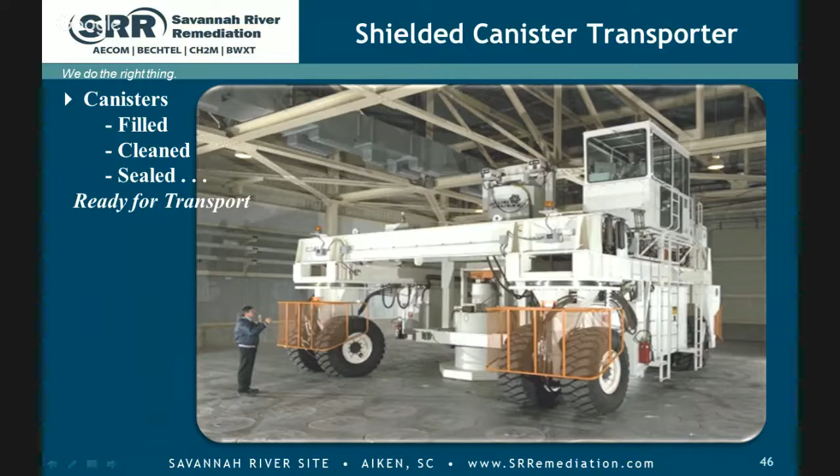We currently have 2 buildings, Building 1 and Building 2. We're in the process now of modifying Building Number 1. They were originally designed so that each canister storage location could hold 1 canister. The initial canisters we produced have low enough heat generation and low enough radiation emission that we can actually store 2 canisters in each location, though there are some modifications required for that.

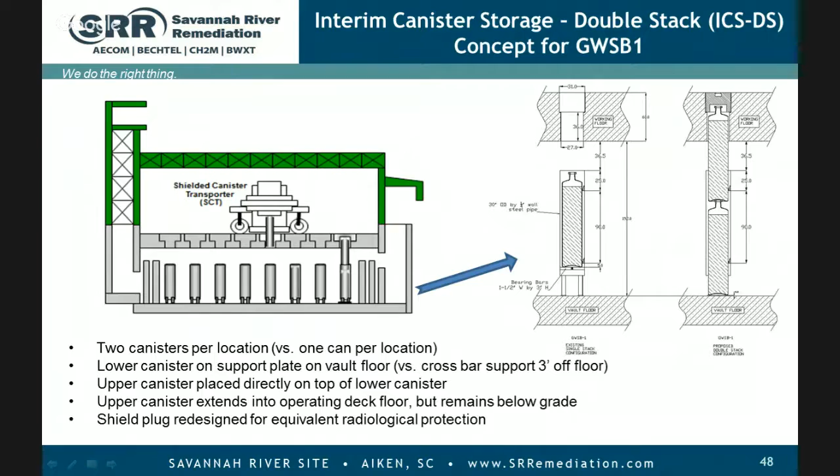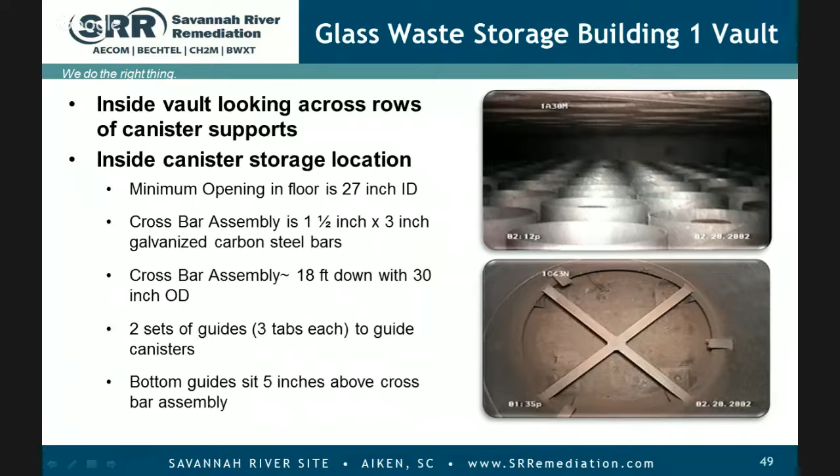Here's a picture within glass waste storage building 1. These are individual canister storage locations - you can see the top of the cover cans there. As I mentioned, each location needs some modification: those storage locations have crossbars that need to be removed, and the plug in each location needs to be modified from a concrete plug to a steel plug, which offers the same radiation shielding but is thinner and more commonly used.

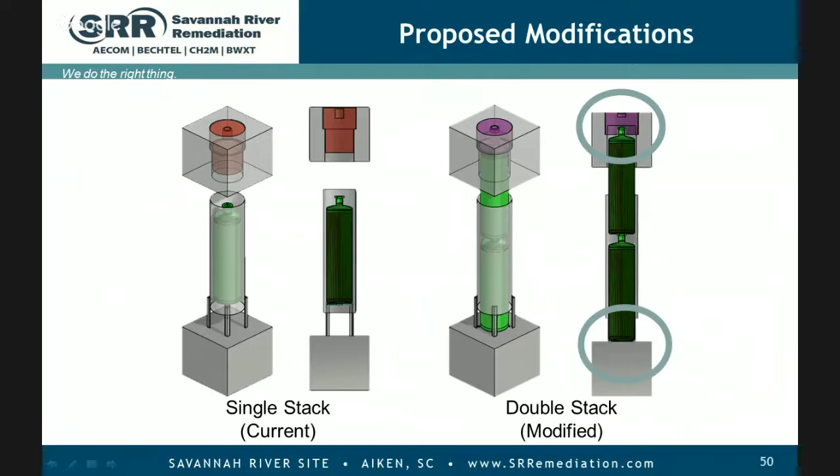We're hoping to use the tank closure cesium removal process to target salt from specific old style tanks to accelerate closure of those tanks. In the process, less than 1% of the radionuclides remain in the tanks that can't be removed in the cleaning process, and they're grouted in place, well below 1% of the radionuclides left in saltstone.

Right now, we process around 18 million gallons of grout, containing about 413,000 curies. The decontamination factors for ARP and SWPF have really improved with better solvent deployment. Ultimately, we expect that saltstone will have around 600,000 curies, below the commitment of 800,000.

So very few radionuclides remain in those two locations. The radionuclides put in the canisters will be eventually disposed of.

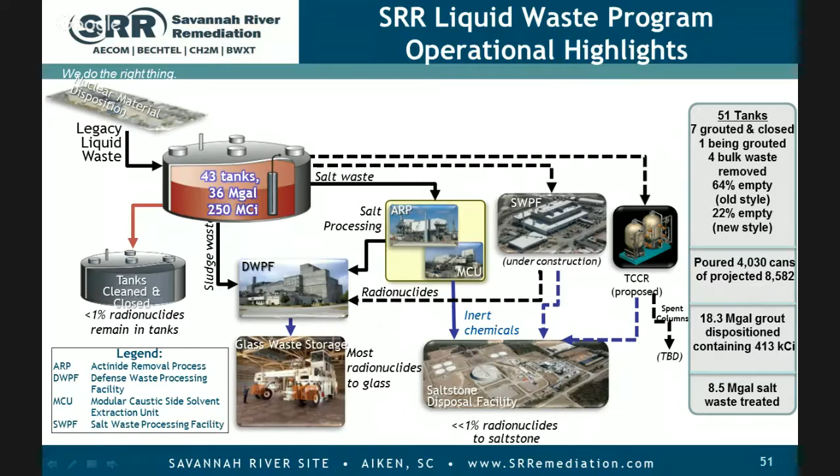Question? Yes, ma'am. Susan Corbett, thank you, that was fascinating. I feel like I was sitting in my high school chemistry class, and it's pretty intense stuff.

So you said this is about 1% of the waste in the bottom. Some tanks have non-radioactive solids that will stay, but by radioactivity, which is the measurement we care about, less than 1% stays within the heels of the tank.

How much plutonium can you actually get in a canister? I'm sorry, how much question? Plutonium can you actually get in, is it how many kilograms, or? It's 897 grams per cubic meter, and a canister is like 3/4 of a cubic meter, so you can do the math. I have to do math? Yeah.